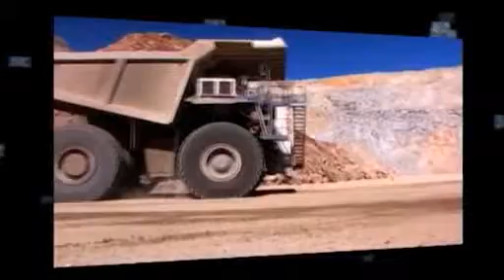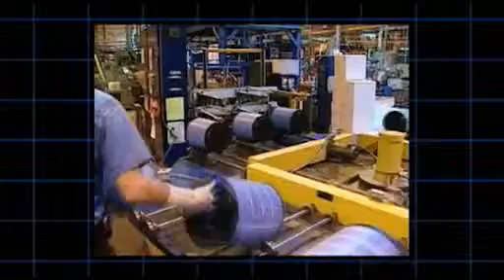In 1915, Frank Donaldson Sr. developed a simple air cleaner to solve a farmer's tractor engine problem. Nearly 1 century of product engineering and hands-on experience has followed. In that time, the Donaldson Company has developed a comprehensive lineup of air cleaners and accessories for engines operating in every possible work environment around the globe.

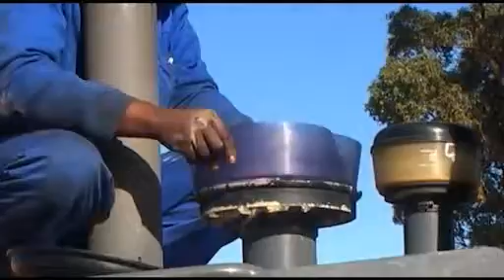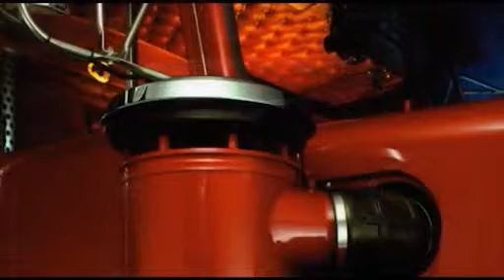This module is a review of accessories that protect and enhance air cleaner performance. Inlet hoods, or rain caps as they're known in some areas, provide protection against ingestion of rain, snow, and large debris. They are used both on-road and off-road and mount on the stack or directly on the air cleaner with one clamp.

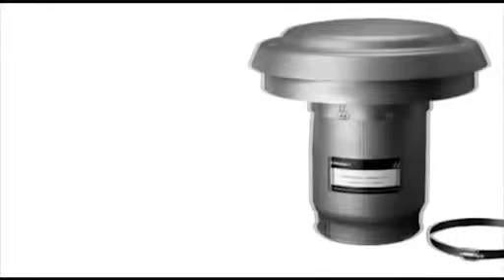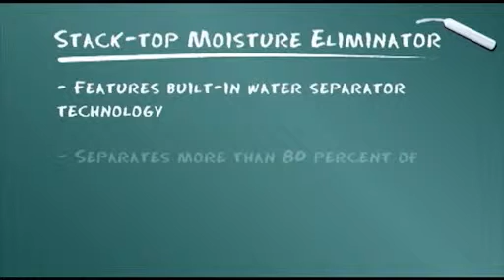The stack-top moisture eliminator for on- and off-road cab-over-engine trucks features built-in water separator technology to prevent moisture problems. As the air spins, more than 80% of the moisture is separated from the airflow.

The low-maintenance full-view pre-cleaner helps extend filter life on agricultural and construction equipment. The centrifugal force inside the bowl separates up to 75% of incoming dust before it enters the engine air intake system. Before you decide on a low-maintenance full-view model, check the advantages of the maintenance-free Donaldson TopSpin.

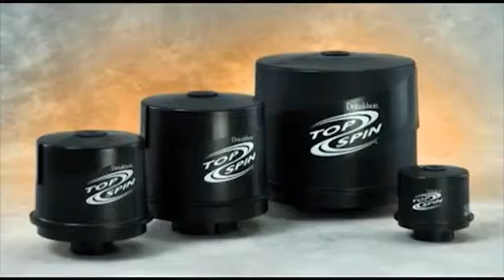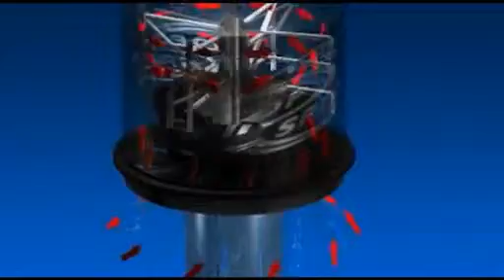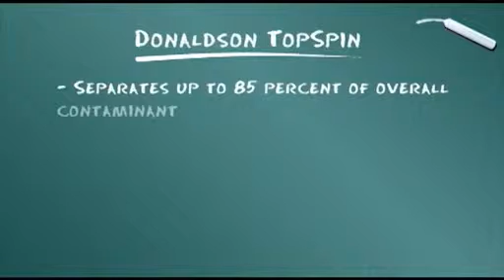The Donaldson TopSpin provides all of the moisture and debris protection of an inlet hood, plus another very valuable feature: pre-cleaning of the air. It is also self-emptying. The TopSpin separates up to 85% of overall contaminant and more than 99% of contaminant particles 20 micron in size and above.

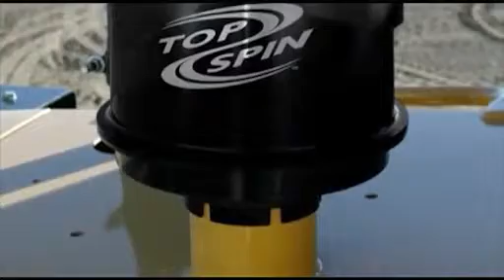These are reasons why the Topspin will extend primary air filter life, boost air cleaner efficiency, and extend engine life. It is made aerodynamically of durable, non-corroding material, and it is easy to install with no wiring or power requirements.

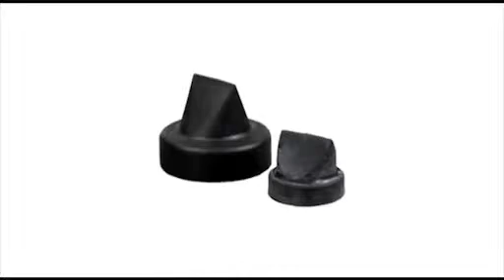Another vital accessory is the vacuator valve, which is standard on the majority of Donaldson air cleaners. It is made in a variety of sizes and is an integral part of the pre-cleaning stage of two-stage air cleaners. Normal engine vacuum pulsing causes the vacuator valve to open and close and automatically expel dust and water.

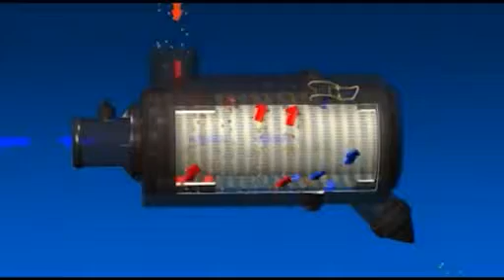For proper operation, the vacuator valve should be located at the lowest point on the air cleaner or dust cup and should be pointing down. Never paint the vacuator valve, and remember that solvents and chemicals will shorten its usable life.

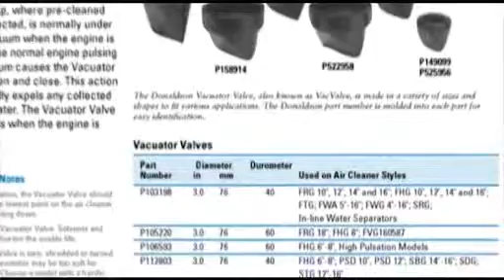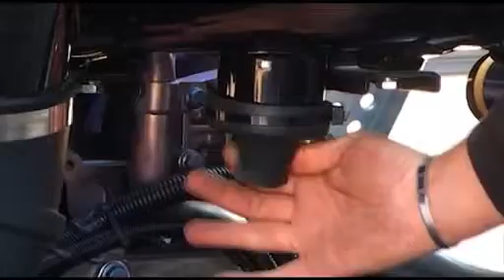If the vacuator valve is torn, shredded, or turned inside out, its durometer may be too soft for your application. Choose a model with a higher number, which means it has a harder durometer. Conversely, if the vacuator valve doesn't empty itself properly, the durometer may be too hard. Choose one with a lower number or softer durometer. Your Donaldson distributor or representative can help you determine which vac valve is best for your application.

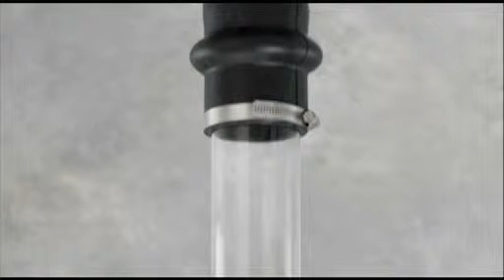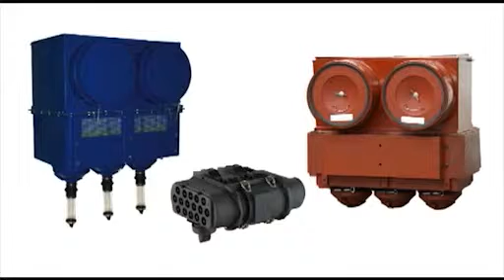The Dust Dump-It tube extension offers improved dust evacuation from the air cleaner, as well as greater safety and efficiency. It is compatible with PowerCore PSD, SSG, and SRG air cleaners, and is available in Dust Dump-It kits. The Dust Dump-It is an effective addition or replacement to your existing dust cup assembly.

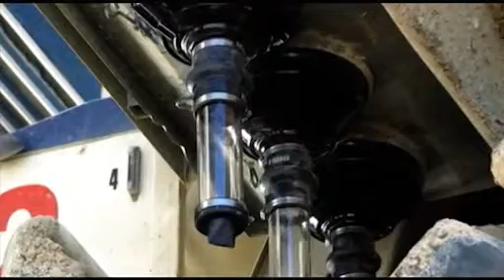When installed on the dust cup, the Dust Dump-It rubber connector vibrates during normal vehicle operation, and gravity assists in dust expulsion. The clear tube also allows for visual inspection of dust collection levels. On large off-road machines, this is much safer and more time-efficient than hands-on inspection with ladders or elevated platforms.

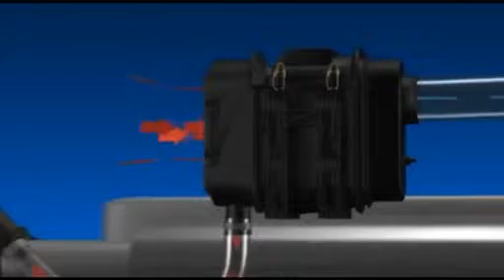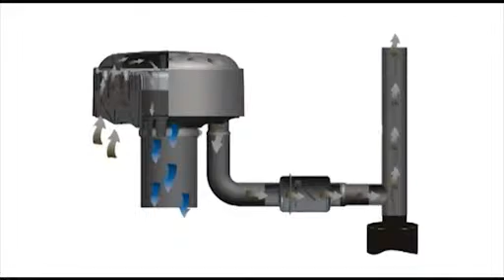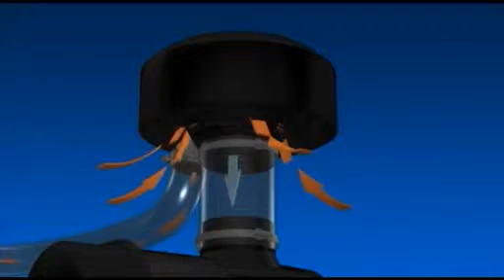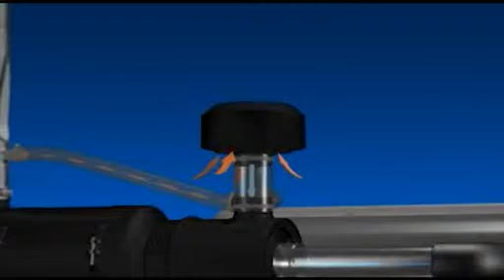We now turn to scavenged flow pre-cleaner systems designed for vehicles operating in extreme heavy dust conditions. These systems harness exhaust energy to scavenge or draw contaminant from the intake airflow and automatically eject it via the exhaust. The highly effective Donaldson StrataCap is a scavenge pre-cleaner and rain cap in one, which operates with no moving parts. Suitable even for challenging fine dust environments, the StrataCap expels 96% of dust and debris through the vehicle's exhaust system.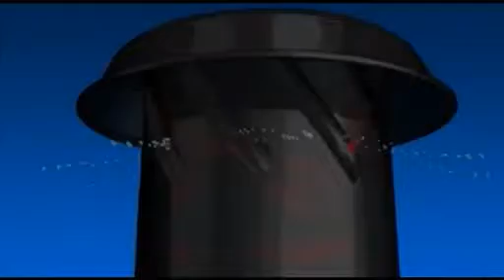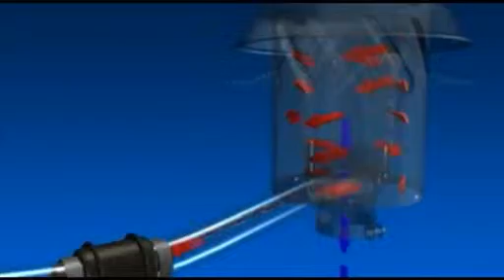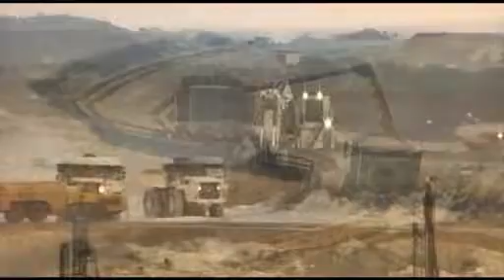Another remarkably effective scavenged pre-cleaner is the Donaspin. The Donaspin removes up to 90% of the dirt and contaminant before it reaches the filter. It is designed with no moving parts for use in very heavy dust and debris environments which threaten air cleaner performance. This includes agricultural applications on tractors, combines, and harvesters. Like the StrataCap, the Donaspin extends primary filter life and helps avoid downtime. The unit mounts on top of the air inlet stack.

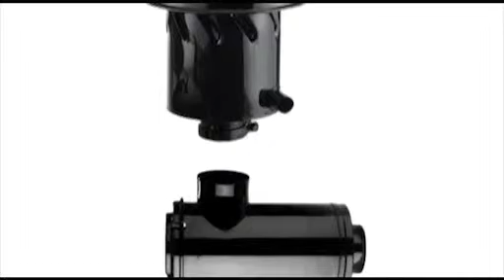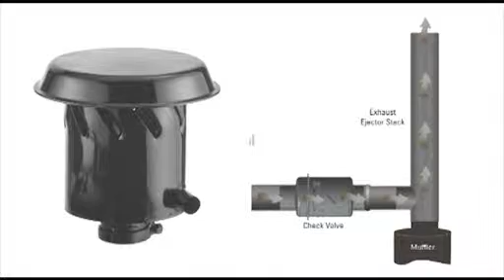To create a scavenged flow system, combine the StrataCap or Donaspin with an exhaust ejector and an ejector check valve. Donaldson now offers two styles of compact ejectors constructed of heavy-gauge aluminized steel. The compact ejector style is designed to reduce space while still maintaining the necessary exhaust flows needed for scavenge systems.

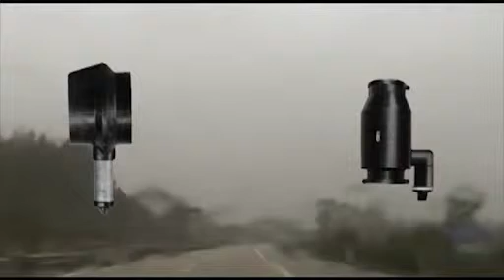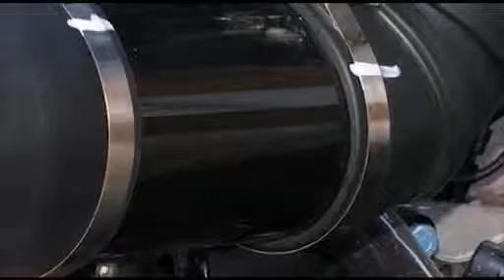There are other Donaldson accessories which protect air cleaners from damaging moisture. These include the horizontal inline moisture skimmer with vacuator valve. It mounts in the engine air intake ducting and removes over 80% of water before it can reach and damage the filter.

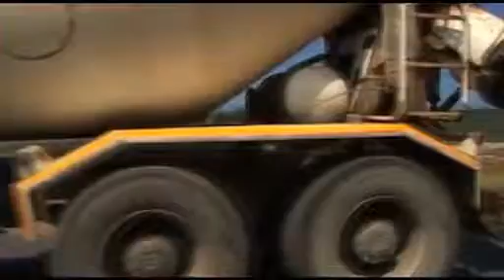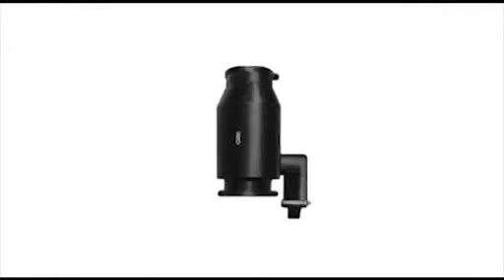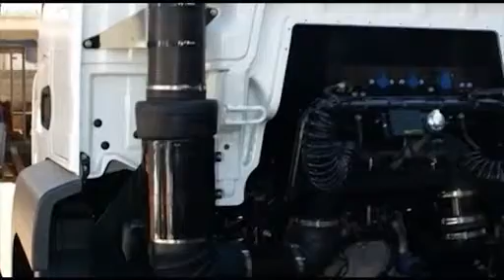When a truck is temporarily being used in heavier than anticipated dust or moisture conditions, you may be able to use a Donaldson inline separator instead of changing air cleaners. Installing a horizontal or vertical inline separator in your single-stage air cleaner system effectively creates a two-stage air filtration system. This enables an on-highway vehicle, which usually sees only light dust, to be simply and economically adapted to off-road conditions where medium to heavy dust is encountered. It is not, however, intended as a solution in constant heavy dust conditions.

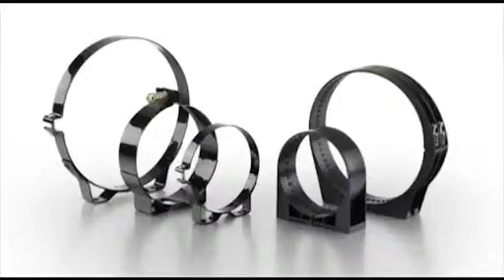The Donaldson series of air cleaner system accessories is comprehensive. It includes vibration isolating connectors, rubber elbows and reducers, air rams, breathers, air stack extensions, intake tubing; mounting bands and clamps are also part of the series. Also included are mounting components specially designed for the FPG and FPG Alexan air cleaners. These mounting bands have tabs on the inside circumference which fit exactly into notches on the FPG housing.

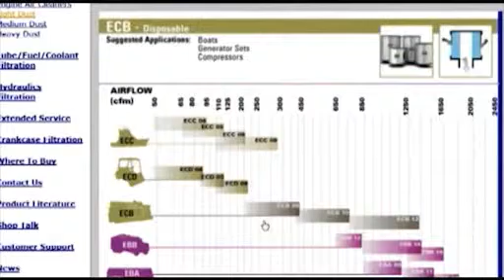This servicing information is provided as a best practices guide. It is not, however, intended to replace or supersede the service instructions supplied by your engine or vehicle manufacturer.